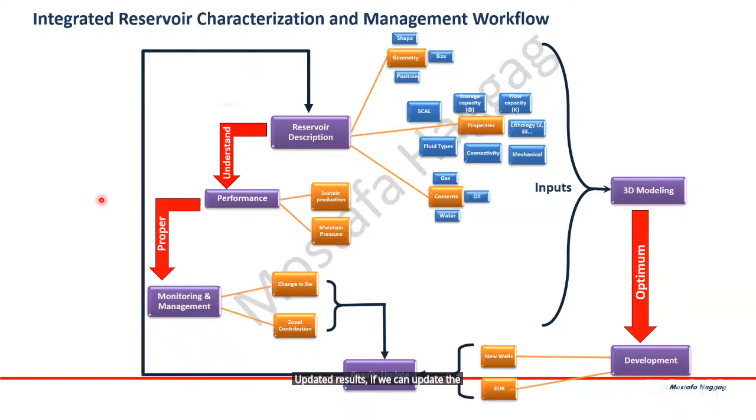Sarah, I have a frame of yellow color, what is this? I have a frame on the screen with yellow color, what is this? No, here in your presentation, you see your screen, which is white, and we can see all the maps saying petrophysics deliverables, operations. You don't see it? You don't see this green one? No, we don't see anything green.

So the petrophysicist can deliver in the process of characterization and management. He can contribute in operations, surveillance, and studies. For operations, for drilling, while drilling the wells, use the open hole interpretation and acquiring data, and also well integrity, cement, and corrosion - and we will talk about this today.

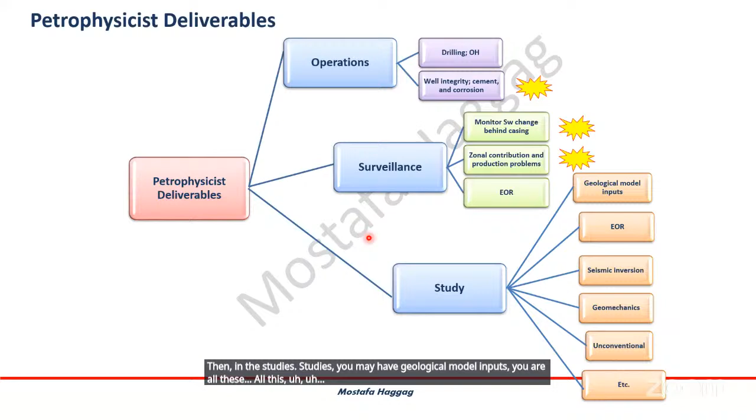For surveillance, you can deliver SW change behind the casing, zonal contribution, and production problems, and EOR. This we will also talk about - monitoring water saturation and zonal contribution - tomorrow. Then in the studies you may have geological model inputs, EOR - all these activities the petrophysicist can deliver or contribute on: geological modeling, EOR, seismic inversion, geomechanics, unconventional, and so on.

Cement evaluation log.

Okay. Before I start with this one, for the people who may be away from the logging activities or this discipline, what is the log? The log is a plot of measurement of one or more physical quantities in or around a well on the x-axis versus the depth or time, or both, on the y-axis.

The term comes from the word log, used as a record or a note. As you see, this is a plot of y versus x. X is any physical property, and y is either depth or time.

In cased hole logging, the tool can be run on wireline in case of a vertical hole, up to 55 degrees, less than 55 degrees hole deviation, or coiled tubing for a horizontal hole, or when the well is deviated more than 55 or horizontal. And then tractor in highly deviated holes higher than 55 degrees, mainly in the cased hole.

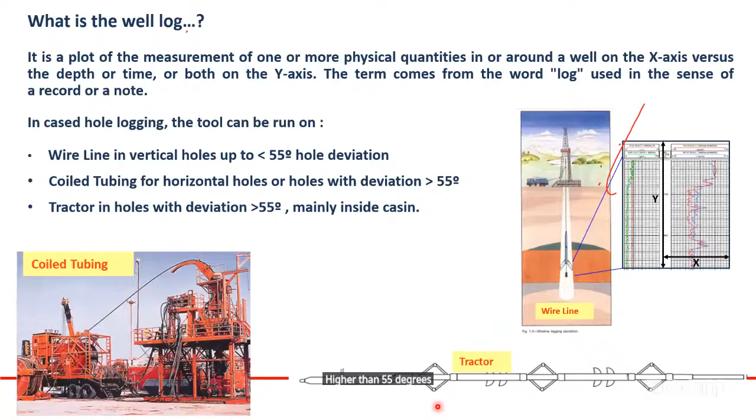Okay, what are the well logging objectives? Open hole logs. In open hole, we know that we use the open hole logs for formation evaluation and reservoir characterization: lithology, shaliness, bed depth, thickness, porosity, permeability index, water saturation, fluid contact, formation pressure, fluid sampling, formation image, and seismic calibration.

In case of cased hole logs, we have mainly three main objectives. First one, we can monitor the water saturation change behind the casing by using what we call TDT, thermal decay time tool. Zonal contribution and production problems diagnosis in PLT, and borehole casing integrity and condition, cement and corrosion.

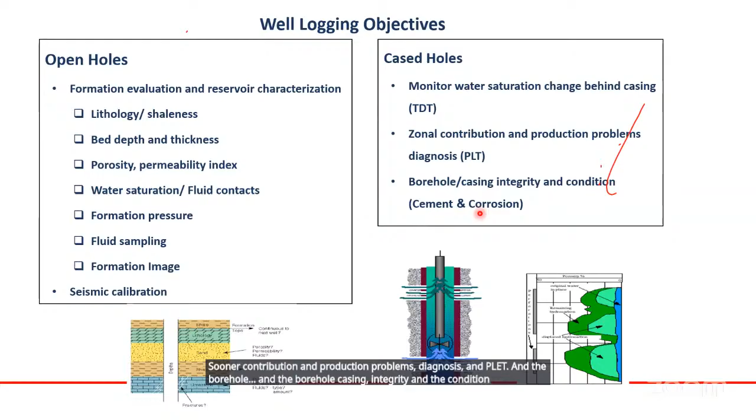The log data acquisition strategy during the field life. We have production on the y-axis versus time on the x-axis, and the exploration phase started with, this red one is the number of drilled wells. As you see, in the exploration phase we have a higher number of wells, and mostly it's open hole. And then we slow down the number of wells, almost flat, and then the field started to produce.

We have secondary and tertiary recovery, and in this case we have mostly cased hole logging, either PLT or TDT, or even corrosion in case of any problem, till we decline. In decline and abandonment, we usually run corrosion logs.

Okay. There is an important note here that much of the information acquired at this time is difficult or impossible to obtain later. So when you drill a well, if you don't get the needed data, you will lose it forever until you pay for another well to have this data. This information can be critical for the field development and exploration.

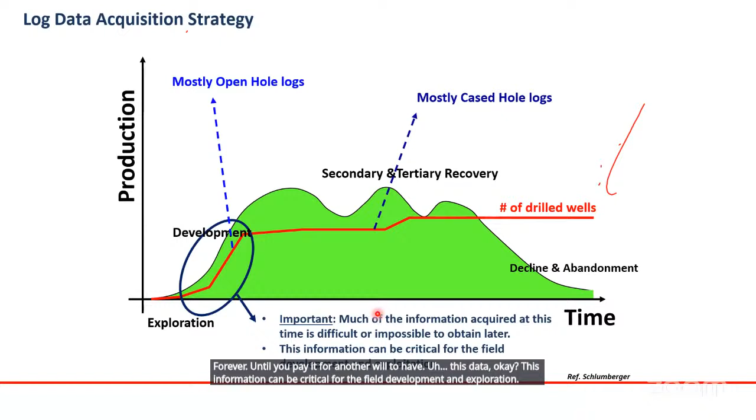Okay, well logs and well stages. We start with drilling wells. We have landing, geosteering, and formation evaluation in open hole logs, either wireline or LWD. So we drill, then run logs for formation evaluation, then run casing and do cementing, and then we run cement bond log and well integrity, mainly cement bond log. And then production. While producing, we usually run surveillance logs like RST or TDT and PLT.

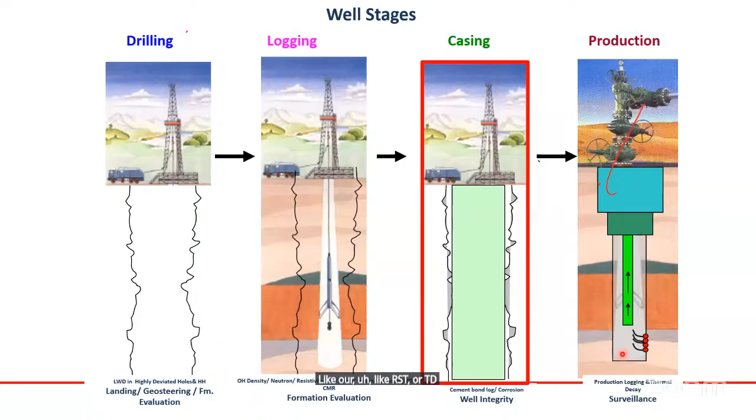Why cement evaluation logging? Now we will start to talk about the cement evaluation log. The first objective is to evaluate zonal isolation: zone to zone isolation, casing cement isolation, cement formation, cement distribution behind the casing to ensure corrosion protection, identify the top of the cement, and evaluate cement remedial jobs.

We have three physics for cement bond log evaluation. Temperature, which is from old days, acoustic and ultrasonic.

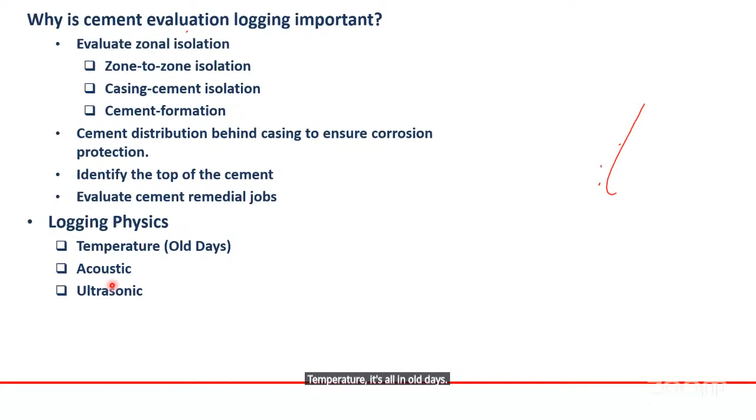Temperature log. Cement hydration: when you cement the well and then leave it for many hours, usually 72 hours, to set the cement. Set meaning to hydrate or to be hard. Cement hydration is an exothermic process. When cement sets, it releases heat. This thermal signature can be captured by temperature logs. This is from old days, not now.

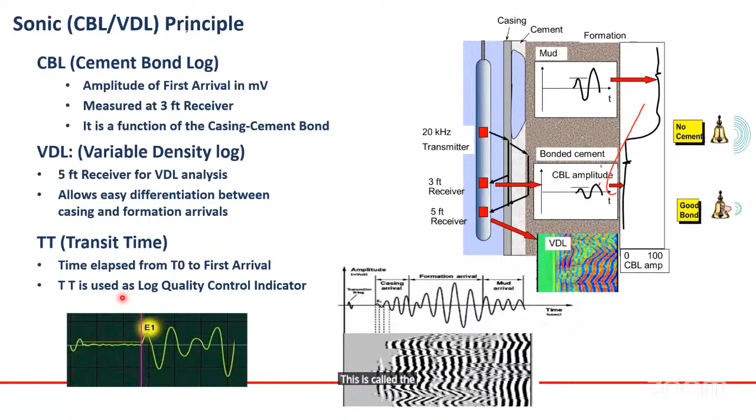CBL VDL presentation. As you see, this is a sample of the CBL VDL. This is the amplitude. Transit time here is used for quality control. And the CBL amplitude, as you see here, shows good cement. If it's high amplitude, it means you have free pipe. If it's low, you have good cement. VDL, variable density log, as you see, is like seismic, but if it has the shape of the formation, it means that you have good cement.

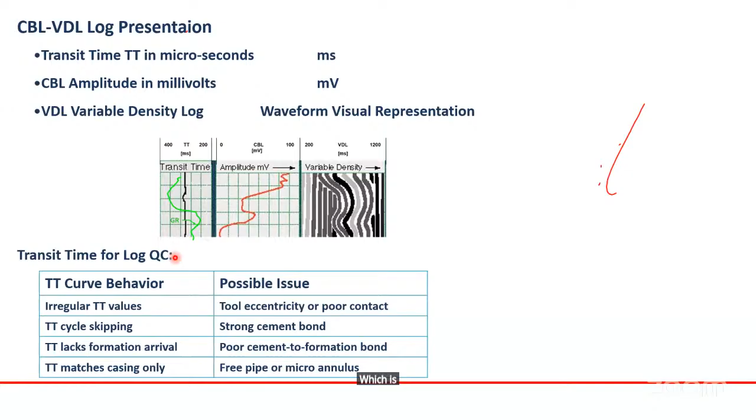Okay, because this is a sonic tool, there are some quality issues that should be considered, and we can capture the quality of the log from the TT curve. An irregular TT curve means tool eccentricity or poor contact; there is a problem in the tool eccentricity. TT cycle skipping, or a value higher than normal, means a strong cement bond. TT lacks formation arrival: poor cement-to-formation bond. If you don't have a formation arrival, you will see poor cement to formation. TT matches casing only, which is about 57 in delta T: it is free pipe or microannulus.

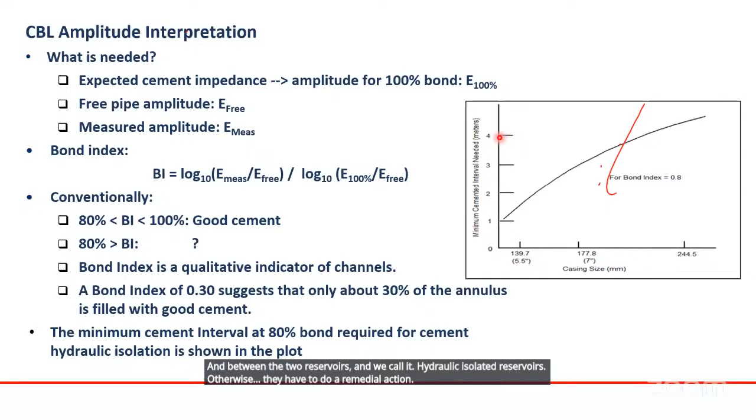Okay, this is just a guideline for the interpretation of the CBL and the VDL. Free pipe: CBL amplitude will be very high, and the casing arrival is strong, formation very weak. Okay, and these are all the conditions. If you have a good bond, casing to formation: amplitude low, casing arrival weak, formation strong. And here there is fast formation: high, swamped by formation signal, and strong. So all these guidelines, I will show you some examples of them.

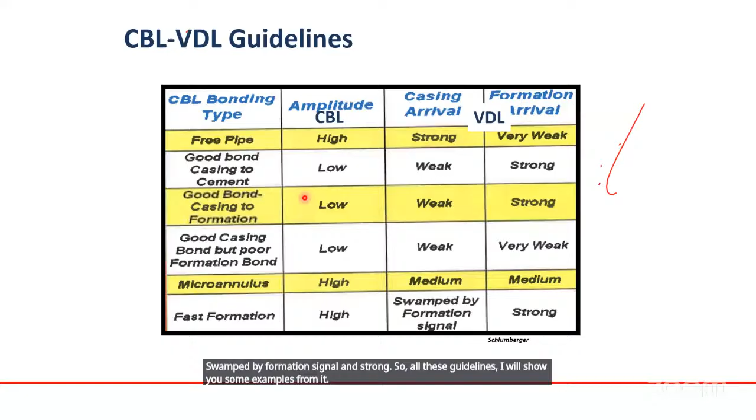The other technology: we talked about temperature as a physics, sonic as a physics gives you an amplitude and VDL, and then the ultrasonic tool. In the ultrasonic tool we use an ultrasonic transducer as a source. In sonic, we measure the signal along the tool. We have a transmitter here and two receivers. This tool is not like this. This tool is just a transducer that sends an ultrasonic pulse and it returns back. So this is based on a radial concept, not an axial concept.

Okay, so the ultrasonic imaging tool transducer. An ultrasonic transducer emits a beam at 200 to 700 kilohertz, spinning about 7.5 rotations per second, scanning 360 degrees of the casing. So it is covering all the casing, and the cement bond around the casing. I want you to imagine that this is a transducer. This transducer sends a beam, the ultrasound, in this direction.

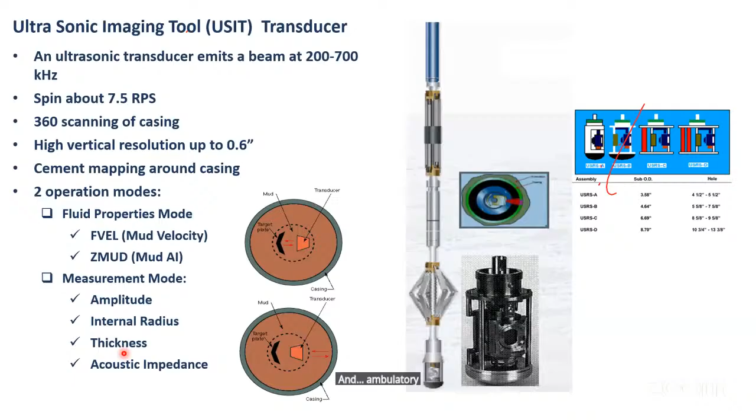So this one is from the transducer to casing, and then some comes from the mud and the casing, and the rest comes from the cement. So it can resolve this to know all the properties: amplitude, internal radius, thickness, and acoustic impedance. A cement map represents the visual indication of cement quality. As you see here, this is the internal casing radius, and then the cement map and the bond index.

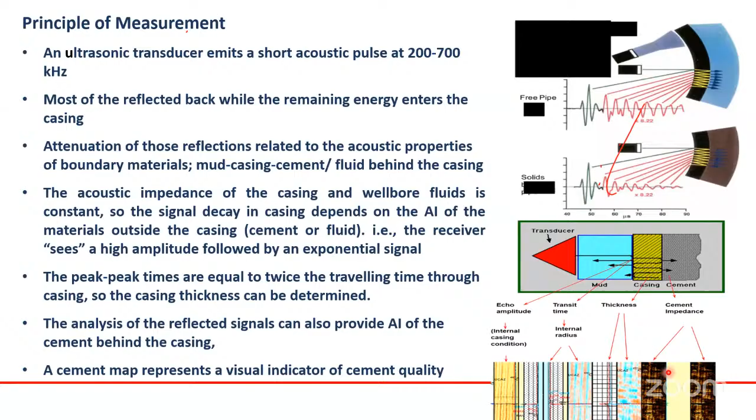How can the tool know this is cement, or gas, or a fluid? It's based on a preset threshold or parameters measured before in the lab. Water is 1.5, and the acoustic impedance of fluid is 1.5 to 3. Gas is very, very low acoustic impedance. Cement slurry is 1.8 to 3. Lightweight cement is from 2 to 5. Class G cement, which we usually use, is from 5 to 7. And the steel is about 46. So it puts a threshold for each one, collects the data, and based on the threshold knows whether this is cement, solid, gas, or whatever.

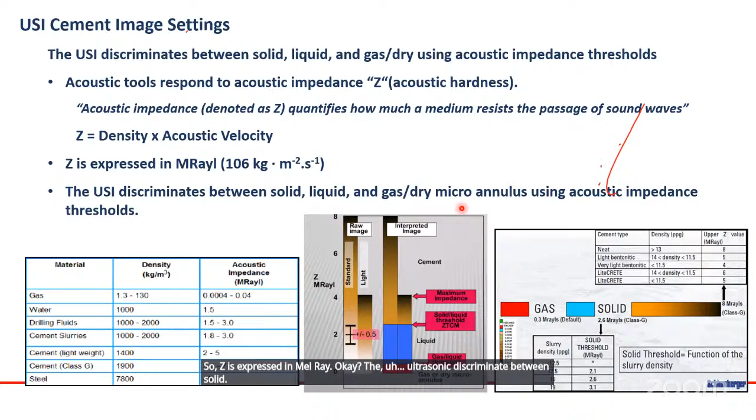So the ultrasonic imager discriminates between solid, liquid, and gas using acoustic impedance thresholds. Acoustic tools respond to acoustic impedance Z. Acoustic impedance, denoted as Z, quantifies how much the medium resists the passage of the sound wave. That is, if you have a solid, how much it resists the sound wave. Acoustic impedance is density multiplied by acoustic velocity. Z is expressed in MRayl. The ultrasonic discriminates between solid, liquid, and gas/dry microannulus using acoustic impedance threshold. I think I repeated this one again.

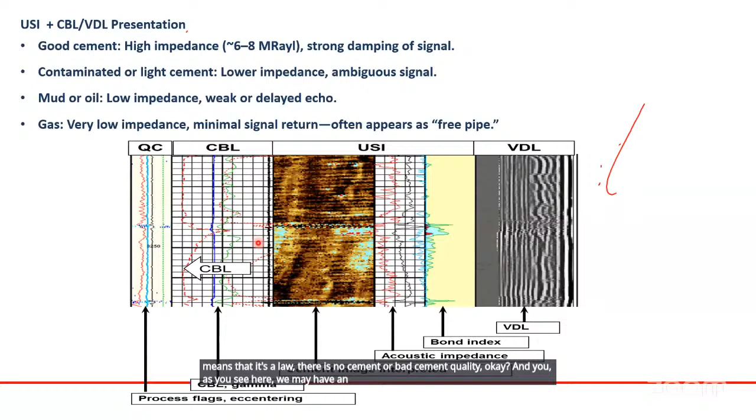This is a comparison between sonic and ultrasonic cement logging. Very quickly: measurement principle, acoustic amplitude and waveform versus acoustic impedance and reflection analysis. Configuration: one transmitter, two receivers at 5 and 3 feet, versus a rotating transducer with azimuthal coverage. Bond evaluation: casing to cement with CBL and cement to formation with VDL, versus casing to cement and cement to formation with circumferential mapping. Resolution moderate versus high quantitative impedance at 360. So the ultrasonic is higher.

Sensitive to microannulus. What is the microannulus? Microannulus is just a gap between cement and the casing, a very minor gap, very small gap. In case of a gas reservoir, this makes a disaster for the production. But in normal practice, if you have a free pipe and the drillers swear that it's a good cement, we ask them to pressurize the casing just to close this gap, and we run the log again and we will see this. This is called microannulus.

Okay, required pressure pass to detect, versus detectable via impedance contrast. So in ultrasonic, if there is any gap, it will appear in the impedance itself. You have a 360 impedance, so you will see the contrast between these ones.

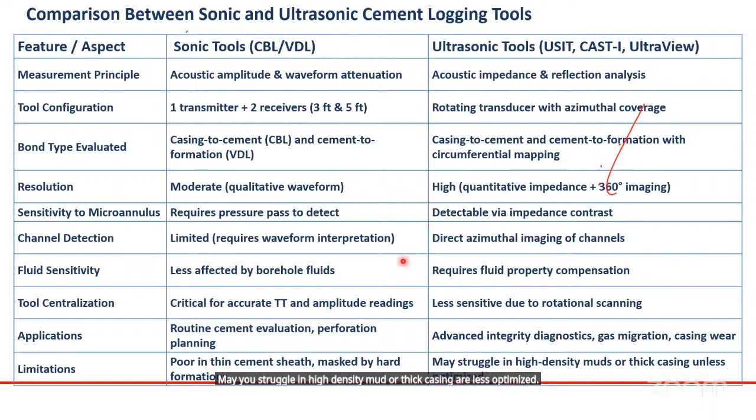Okay. What are the factors affecting cement log interpretation? Microannulus, I think I explained it. It's a tiny annular gap between casing and cement, which will result in misinterpretation. Generally, pressure up the casing. This is important. If the cement is not set completely and you pressurize it and inflate the casing, this will create more gaps. So be careful about pressurizing the casing before the cement is set. It will create another gap. It may damage the cement if it's not fully set. It is to close the gap if the cement job was good.

Ultrasonic tools are less affected than CBL, VDL, and SBT in the presence of liquid in the gap, with the opposite effect in the presence of gas. Eccentralization: potential concern in deviated and horizontal wells due to absence of cement on the low side and the small distance between casing and the formation face. Logging tool centralization is mandatory for USIT and CBL VDL. The SBT pads with articulated arm are unaffected.

Fast formation: the acoustic signal from some formations reaches the receiver ahead of the pipe signal. Fast formation affects the CBL, VDL, SBT logs, but doesn't affect USIT interpretation. Lightweight cement: lack of contrast in acoustic properties between lightweight cement used in weak formations and regular cement slurry.

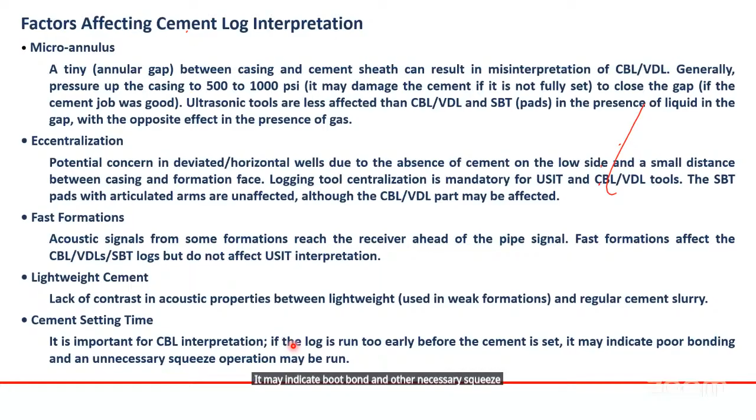What are the cement bond challenges? As you see here, we may have a casing weld. It will appear in the casing in log interpretation. Muddy channel in cement: as you see here, there are some muddy channels, like these ones. Well-centered casing, good bond: as you see here, the cement around the casing is good and centered, and we have a good cement, right? Washout in the formation itself, so you may have some mud in it. It will appear in the interpretation.

Pipe against formation. Here, I think in shale, if you have shale parts, you might have a phenomenon, it's called the galaxy, but I don't see it here. Galaxy phenomenon is where the shale is contacted with the pipe exactly. Okay. Mud left in the washout. Gas invasion. You have perforation. You may have it in old wells, right?

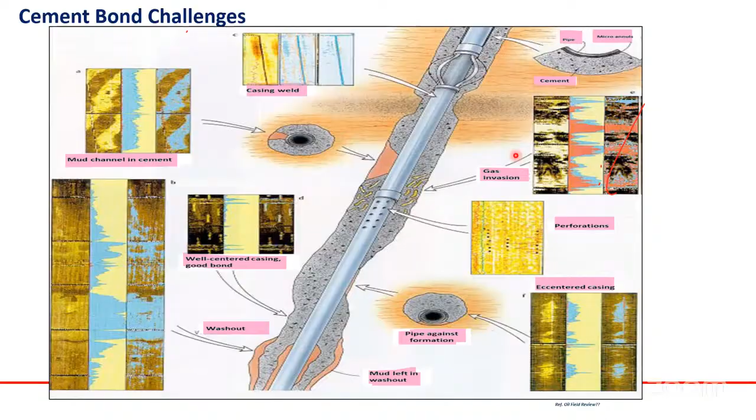Okay, now this is CBL VDL examples of a good log. As you see here, we have a good CBL example. We have a formation arrival. There is no casing arrival - this is a casing arrival, we don't have it.

So high quality TT curve, it's almost constant. We have a good one. CBL with relatively small amplitude. This scale is from 0 to 10, and also from 0 to 100 for high amplitude. As you see here, it's very low, a very low amplitude.

Okay, verify the VDL. No casing arrival, lots of formation arrival. And here TT is, as you see, it's erratic TT.

Okay, CBL VDL high straight amplitude, as you see here, and this is the colors, by the way. It means that it sees the casing and its color - there is casing arrival and very weak formation arrival, as you see here, these are the colors, not like this one.

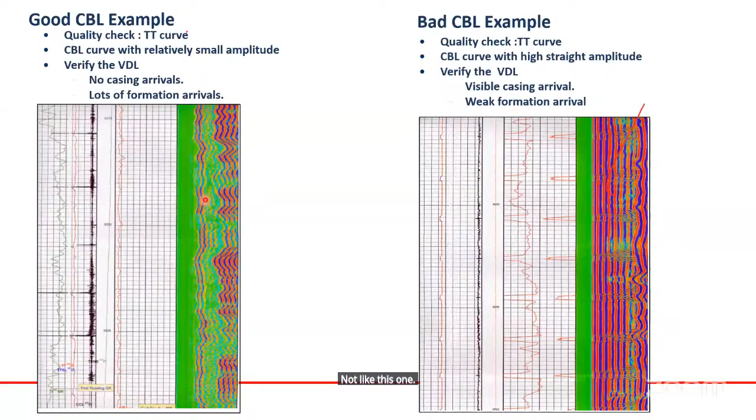Okay, here, as you see, we have a casing arrival here, and in some parts you have fast formation - it's passing the casing arrival. So in case of good cement and the formation slowness less than steel, say 5 microseconds per foot, the formation arrival arrives first - transit time shorter than casing arrival. The transit time and CBL amplitude will be affected. High CBL amplitude in areas of fast formation arrival means no CBL evaluation is possible.

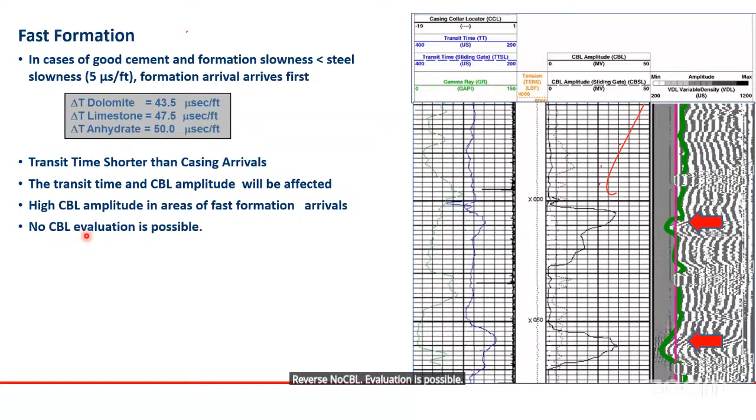So what's your question? When my formation has, for example, two reservoirs differentiated by shale - top shale, then sand, then shale, then shale again - it's a sand shale sequence, but the thickness of the sand and shale is very small, and we are producing from these sand reservoirs. In that condition, what should be the minimum thickness for the cement, based on the casing size? If you have 7 inch casing, according to... first of all this is used in case we have a differential pressure between both, a big contrast in pressure between the reservoirs.

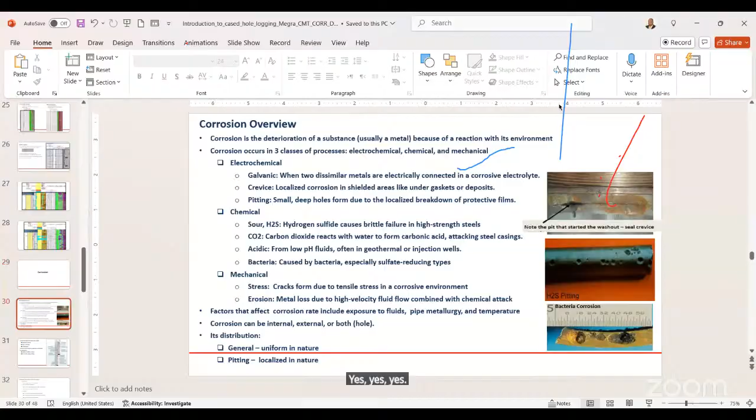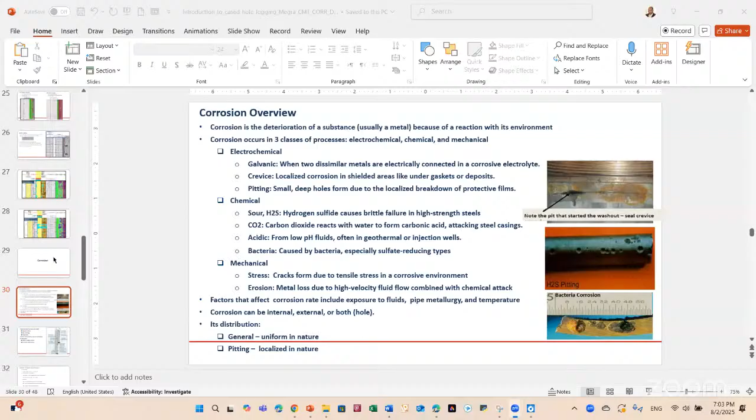Hello? Hello? Yes. Hello, yes, can you hear me? Yes, we can hear you. You can make your question.

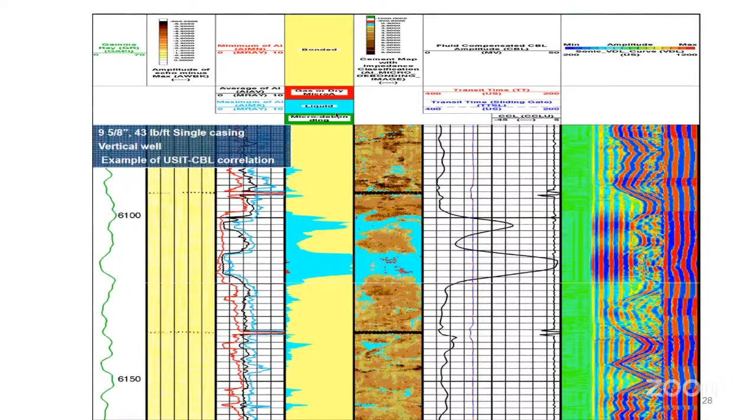Now we finished the cement bond log, and as you see, it is crucial. But I tell you, from my experience at ADCO, because I worked there for many years in Abu Dhabi, UAE, the cement bond log is expensive, and we waste a lot of time waiting, and also we don't make any remedial action for very long time. So the company decided to put some criteria for the cementing process. If this criteria is fulfilled, as per textbook, we don't need to make a cement bond log in every well, just make a random test or random check to see if it's good or not.

My question is, what is the challenge with lightweight cement? As I mentioned, it's a lightweight cement, you cannot differentiate it, it is not characterized with the tool at that time. So with lightweight cement, you don't know if it's fluid or lightweight. That's it.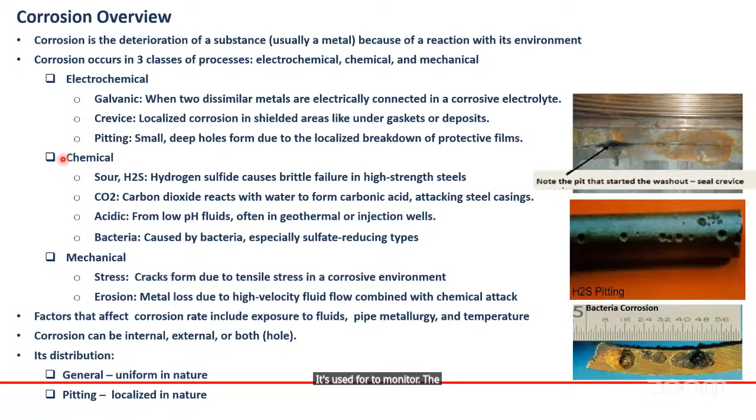Factors that affect the corrosion rate include exposure to fluids, pipe metallurgy, and temperature. Corrosion can be internal, external, or both, and its distribution can be general, uniform, or pitting. Corrosion logging is used to monitor the rate of deterioration of the casing over time.

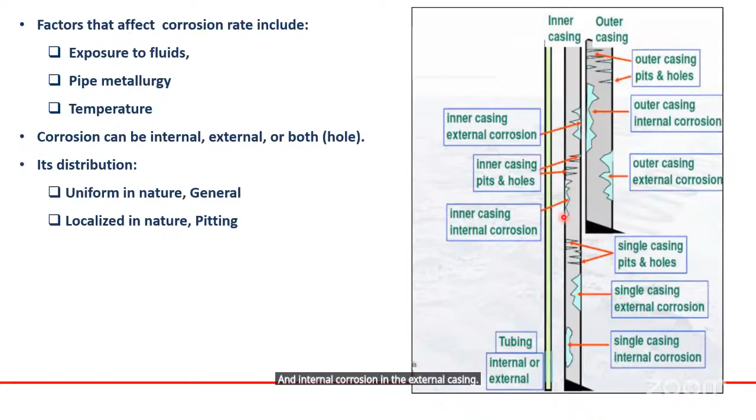Factors that affect corrosion rate include exposure to fluids, pipe metallurgy, and temperature. Corrosion can be internal, external, or both, and its distribution is either uniform/general in nature or localized, like pitting. As you see here, if this is a tubing, and this is one casing and another casing, you may have external corrosion in the inner casing and internal corrosion in the inner casing. You may also have external corrosion in the external casing, and internal corrosion in the external casing, and so on.

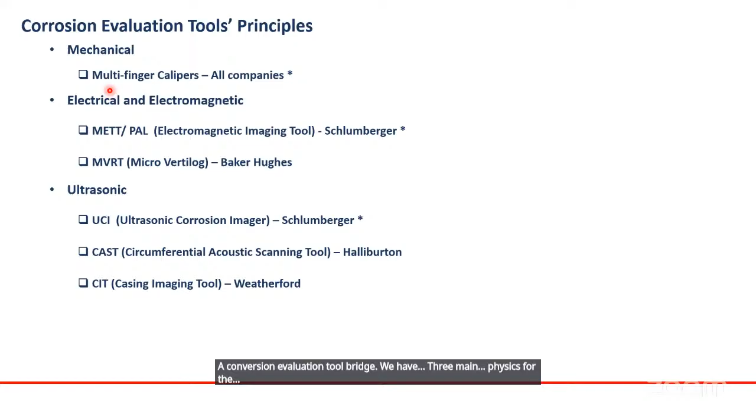A corrosion evaluation tool principle: we have three main physics for corrosion evaluation. The first one is mechanical, the second is electrical and electromagnetic, and the third one is ultrasonic.

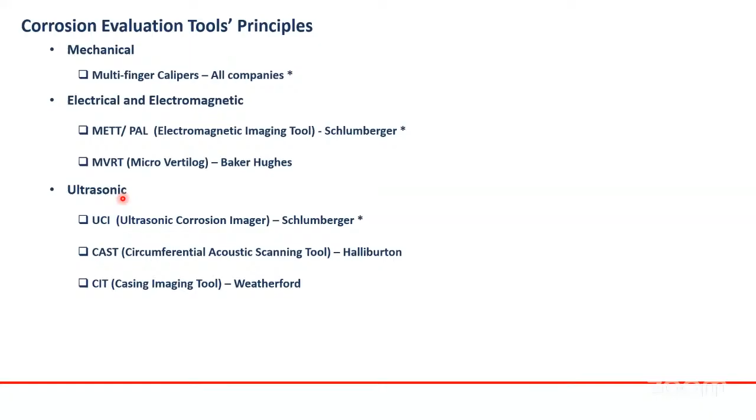The mechanical one is just a multi-finger caliper, with 24, 40, 60, and 80 fingers, based on the size. This caliper touches the inner diameter of the casing and measures the diameter itself. From this, we can map or see the reduction in casing, or the increase in diameter, or the corroded parts.

It can identify internal metal loss from corrosion, erosion, or mechanical wear. It measures the minimum and maximum internal tubing or casing diameter. It locates casing collars and diverter valve tools, identifies casing joints with different weight or wall thickness, locates collapse or holes in casing, and distinguishes between parting and splits in the casing. It can be 24, 40, 60, or 80 fingers.

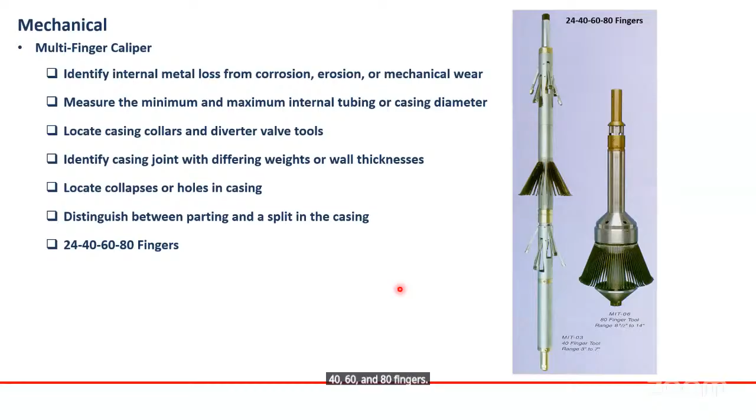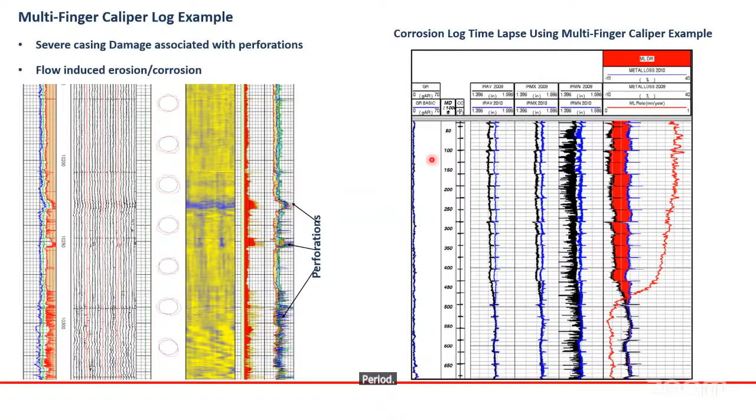The electromagnetic tools.

This tool, where we usually run the electromagnetic tools, we call it METT PAL. The PAL tool is a pipe analysis tool.

What is the pipe analysis tool? The tool has upper and lower arrays, each containing 6 pads, like FMI, which are oriented to assure 100% coverage of the casing.

Each pad contains a pair of coils for measuring both flux leakage and eddy current. The electromagnet in the sonde is the source of magnetic flux. The tool was designed to maintain equal flux density for the casing size, but it will be distorted in the vicinity of external or internal damage.

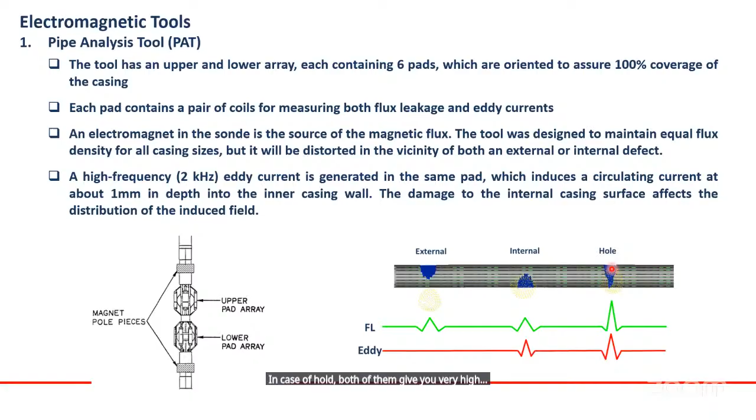So if the total is not good and the inner is good, it means the corrosion is external. And if the total is not good and the eddy current is not good, it means the corrosion is internal, right? In case of a hole, both of them give you very high damage or very high response.

According to how the eddy current defect diameter is measured and scaled: half division equals 12 millimeters, two divisions is 18 millimeters, 4.5 divisions is 24 millimeters. This is for flux leakage and so on.

Half division is 10%. One division is 20%. Two divisions is 40%. Three divisions is 60%, and four divisions is about 80%. So he measures this and scales it on a log or plot, and can measure how much the severity of the corrosion is.

If it's less than 20%, this is rated 0, or there is no rate on it. The corrosion is rated in codes according to severity. Rate 0: light magnetic anomalies, indicator of limited corrosion, less than 20% penetration. Rate 1 or code 1: light to moderate magnetic anomalies indicating corrosion corresponding to 50% penetration. Code 2: moderate to severe magnetic anomalies indicating corrosion corresponding to 50 to 100% penetration. Code 3: extreme magnetic anomalies indicating extreme corrosion.

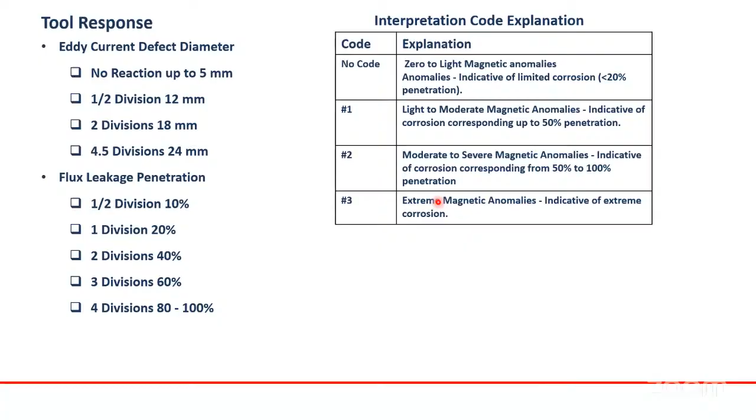This is the presentation of the PAT log. As you see here, we have an eddy current upper array, flux leakage upper array, eddy current lower array, and flux leakage lower array. As you see here, this is how they put it in this presentation.

Flux is below one division. As you see here, it's 1, 2, 3, 4, 5 divisions. Below one division indicates penetration of less than 20%. The log shows significant eddy activity, less than one division, indicating generalized internal pitting up to 12 millimeter diameter or internal scale. So from this division, according to the code, we will know the severity of the corrosion itself.

At 1319, there is a pit with 50% penetration, and it is external, because the flux gives 50 and the inner gives 0, so it's external. At 1322.5, there is a pit with 35% penetration, and it's external. This joint is considered code 1, according to the table.

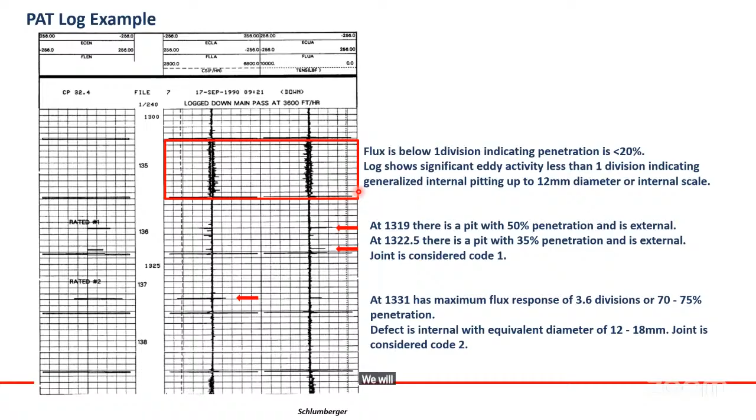Okay. This is the log in recent days. The log shows significant flux leakage and eddy current. Eddy current is here, and eddy current is here, and the flux leakage is here. So the pattern shows up from 754 to 764, this part. The pattern shows less than 20% penetration, but appears to be man-made, as you see here.

This one is showing on eddy current and the flux leakage. So this is man-made and probably related to pipe manufacturing. There is a problem in the pipe manufacturing, internal, in the casing, right? So an internal part. Okay.

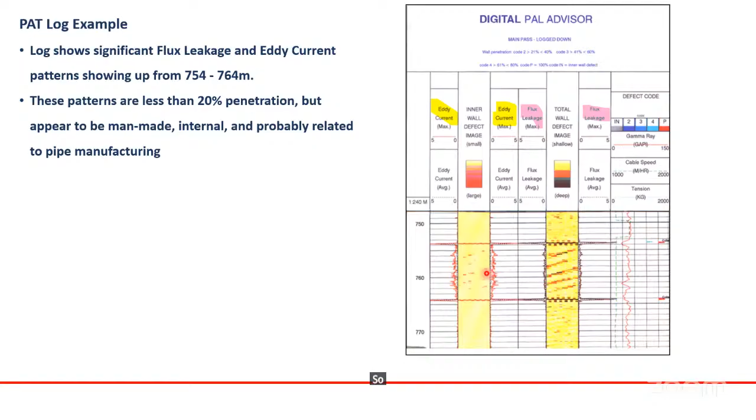The second tool is called the multi-frequency electromagnetic thickness tool. Sometimes you need to detect if we have 3 or 4 casings. Actually, I don't encourage this, to see the third casing from outside or from inside to see the corrosion, because if the casing is good in the inner part, there's no need to see what is behind the third casing. You can do it, but I don't think it's a very important issue.

It's for detecting large-scale corrosion, such as thinning, holes larger than 2 inches, and vertical splits, and detecting metal loss in the outer casing of multiple casings. So in case you have a rupture or complete damage of the outer casing, yes. But otherwise, I don't think it will help. Anyway, a coil generates an alternating magnetic field that interacts with the casing. A second coil measures the field phase shift, which is related to three casing properties: magnetic permeability, electrical conductivity, and thickness. If the first two are known, then the thickness is known.

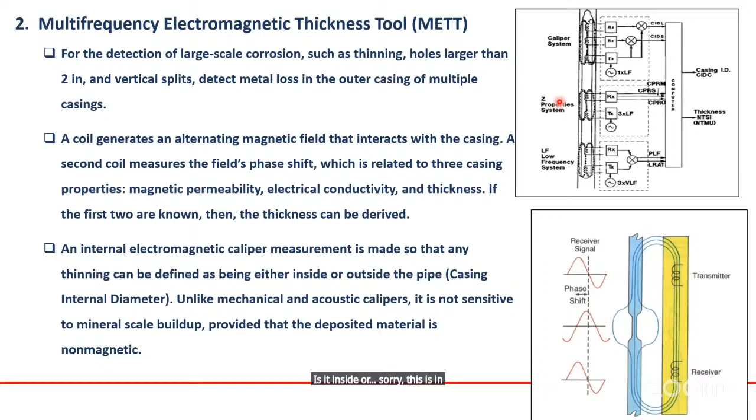So here you have the electromagnetic caliper, and it shows you the internal diameter, and the magnetic field phase shift shows you the total thickness damage. So from the internal and the total, you can see whether it is internal or external corrosion. Here is the raw data, the METT log presentation as raw data. And here is the interpretation of it.

So external metal loss. This is another example of METT. External metal loss of approximately 20% here. The internal caliper does not change over the defect. It means that it's external. Here is the caliper, as you see. And the outer one, this one, as you see, has external corrosion.

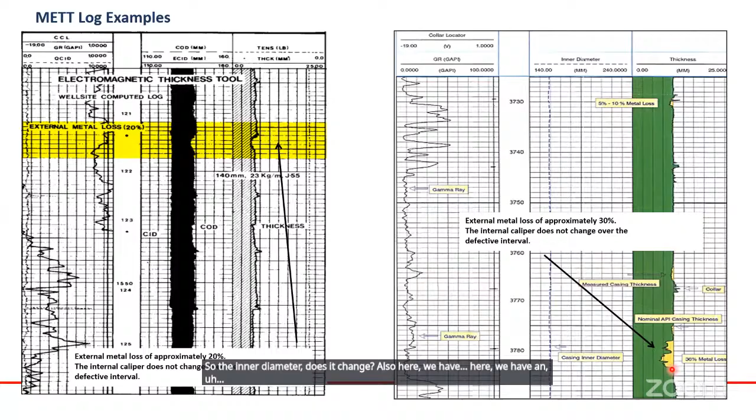External metal loss of approximately 30%, as you see here. The internal caliper does not change over the defect. So the inner diameter doesn't change. Also here we have a metal loss of about 30%.

The third tool is the ultra corrosion imager, UCI. It's the same physics as the USIT, which we explained in cement. So it's the same basic tool, USIT, based on open hole imaging. It is used for cement evaluation, casing geometry, and casing corrosion. But in this one, the transducer is high frequency and more focused on the target. Okay, so this is the UBI, which is USI but for oil-based mud.

Sorry, UBI. So this one is USI, where the transducer is flat, but here we are focusing with higher frequency. So UCI is high-resolution internal and external casing corrosion and damage analysis. USI is cement evaluation, with baseline internal and external corrosion and damage analysis and pipeline inspection. This is a secondary application.

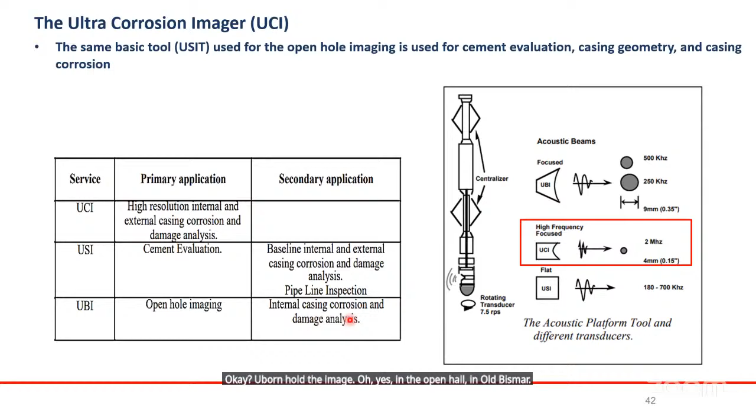So it's the same. The UCI transducer is especially designed for corrosion evaluation and application. The other two have secondary corrosion application that can be exploited in the same run in the hole as a primary measurement. Okay, so we emit a signal, and we have it reflected from the casing and from the cement, and the two peaks can give you the casing thickness.

Okay, it's exactly the same. We have a measuring mode, and we have a fluid properties mode. Okay, and it can give you internal radius, internal rugosity, casing thickness, acoustic impedance.

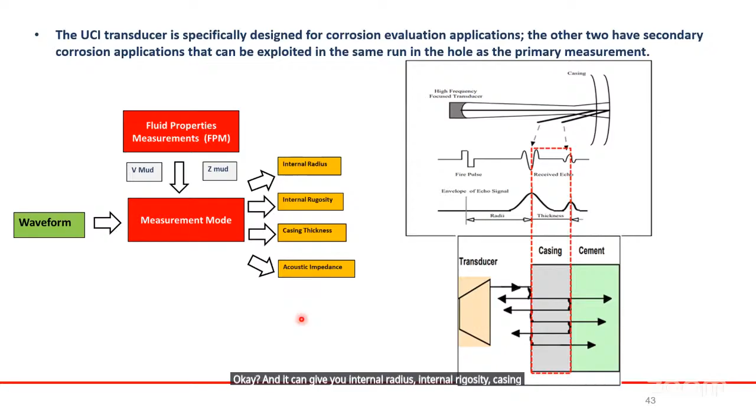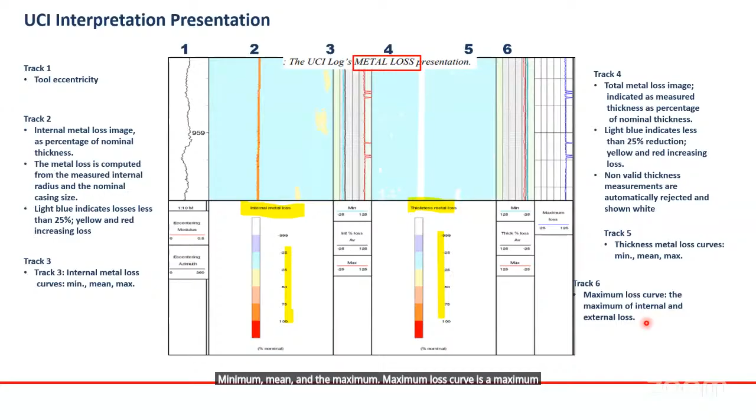The thickness image here is a clear example. For the UCI log example, the thickness image is blanked out along the groove and across the joint because a reliable thickness measurement cannot be made there. The casing must be in good condition internally to make a good thickness measurement. The UCI log at a bigger scale shows small patches of internal corrosion just above the joint and a reduction in casing thickness due to the threads.

Okay, as you see here, we have a problem here. This is a thread of the casing, so it shows some corrosion on it, and this is a cable groove. Okay, and we have casing with different weight, and this is a manufacturing variation, and the thread here shows some corrosion above the thread.